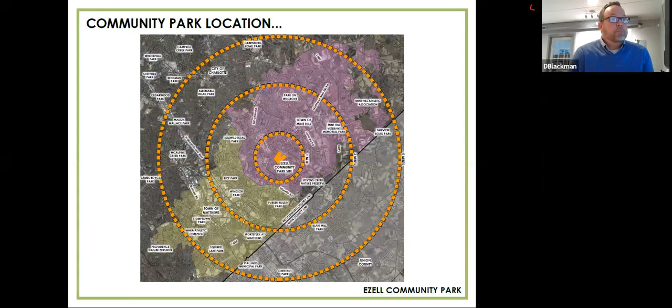Let's move to the next slide. As James mentioned, we're going to go over the definition of what a community park is, just to keep it in the framework of understanding the size of this park, its intended attributes, and how it's supposed to serve the citizens of the county.

Generally, as a minimum, community parks are 20 to 100 acres in size. They're designed to serve a more localized area of the county, usually within a 15-minute drive, so 8 to 10 miles out.

The amenities can be active or passive, or a combination of both. Active amenities are things like fields and courts. Passive amenities include walking trails, picnic shelters, and similar features. Compared to regional parks, community parks tend to be smaller in quantity, size, and the amount of tournament play that happens there. As with all community parks, Ezell Park will also have a required 100-foot buffer around the property to protect the neighbors. With that, we'll turn it back over to James.

He'll speak to a review of the input data we've received through the public input website, as well as the public meeting we had recently. Thanks, Dan. I've always wanted to say 'survey says,' so if I say that a lot, please bear with me. But this is information that we got off the website, which was very interactive.

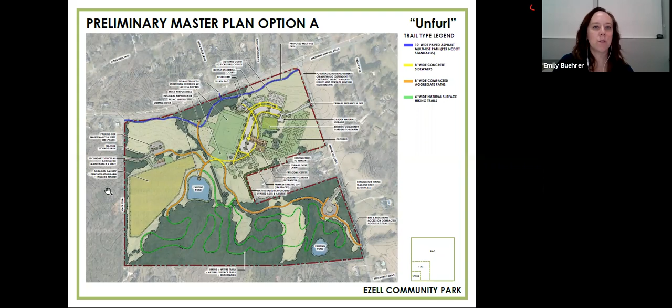And then if you switch to the next slide, we're gonna dive a little bit more into detail on the core area of the park where most of the amenities are.

So we have the Welcome Center, which is sited along the ridge of the park near the highest point to allow for the vistas and capture the breeze in the summer.

The building is oriented east-west, so the low sun in winter will help heat the building while the overhangs shade the building to help cool it in the summer.

The southern building overhang opens up to the proposed community garden expansion area, which is about a quarter of the size of the existing gardens. Due to some of the site constraints with this scenario, the room for expansion is limited in this option.

The rear and northern building overhang opens up into a semi-formal event lawn that is terminated by the existing large oak trees that sit on the knoll of the property, with a working orchard draped over the topography beyond.

Looking west from the entrance of the Welcome Center across the ridge line is the large mowed field area spanning the ridge that could be used for practice or pickup games, with that view from the Welcome Center terminating at a small picnic structure beyond.

Leaving the picnic shelter and following that curved spine to the south, you travel along the vegetated windbreak and through a field with birdhouses to a sloped oval lawn that is the informal amphitheater.

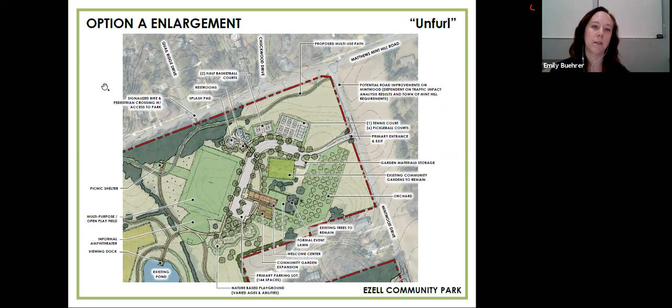And I'm going to pass it to Pete with Stitch Design Shop to kind of go through an option of the architecture of the Welcome Center. Thanks, Emily.

The Welcome Center, as Emily mentioned, is on top of the ridge, and it is low slung and agriculturally inspired from its form and its materiality.

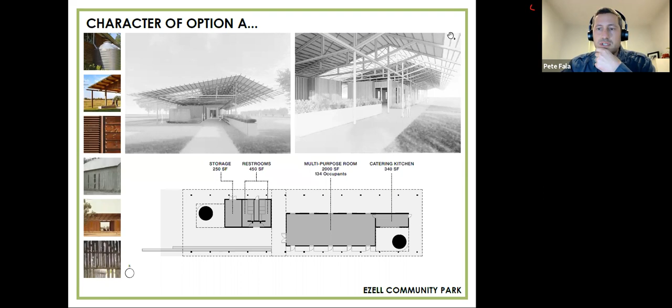You'll see some inspiration images on the left of the page, and I'll start with the plan on the bottom. The program of the Welcome Center includes a multi-purpose room that's around 2,000 square feet with a warming kitchen and catering kitchen. Also included are public restrooms accessible from park visitors as well as folks renting the multi-purpose space. So it's a dual function, and there's some storage as well in that element.

The two darker images that you see in the plan are cisterns. So we see this low slung roof form being able to capture water, store it on site, and reuse it for the community gardens planned north of the Welcome Center and the expanded community gardens planned south.

One of the main aspects of this particular design is that circular path that Emily was talking about really pulls visitors through this space, creating areas of space under the roof structure—outdoor rooms that are not necessarily enclosed, but covered. So you can understand how you would use the facility if you're just in the park as a visitor, or if you're attending an event at the multipurpose room, you're able to spill out into these areas.

The form is agriculturally inspired. The materials are nature-based, and you think of the inside of a tobacco barn or a decommissioned farm implement when you're in this structure. It really takes advantage of that low slung roof form to celebrate the history and the pastoral nature of the land.

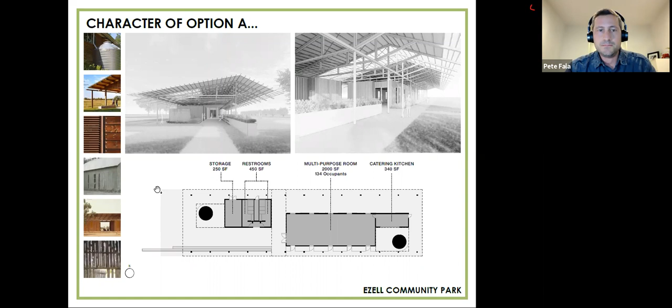Go to the next page. All right, so we have nicknamed this option Sunday Drive. The drive into the park is really meant to feel like an old-fashioned Sunday drive, slow-paced and relaxing, curving up, down, and around the terrain, incrementally revealing the natural beauty and the pastoral landscape of the property.

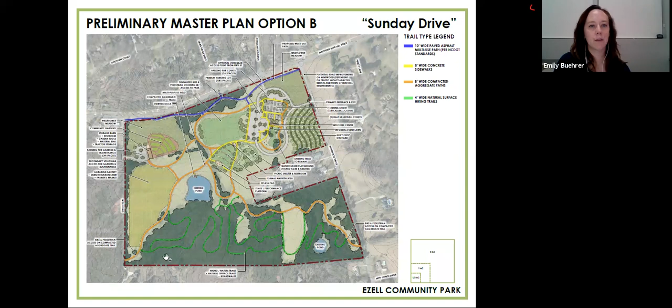On the next slide, we'll dive into the park core a little deeper. The drive and the trails meander to try to preserve and protect the existing habitats while providing opportunities to observe and interact from a distance.

The Welcome Center is situated on the ridge along the east-west axis to take advantage of passive solar and wind opportunities. The gathering space looks out on and opens up to an informal event lawn that is just a mowed area, with the natural site vegetation left to grow up around the edges, framing your view up to the old oak trees on top of the knoll.

A gravel path extends beyond the building toward the alley crop orchard that contours with the land. North of the Welcome Center, we're proposing a vegetated buffer to create a slight separation from the active sports courts, where we have two half basketball courts for fun pickup games with friends, and an area for pickleball courts and/or tennis.

There's a small separate parking lot just north of the tennis courts for court use. To the west of the main parking lot is an open mowed field that can be used as a multi-purpose field for practice, pickup games, flying a kite, throwing a football or frisbee, having a picnic, or just a place to take the little ones to run and burn off some energy.

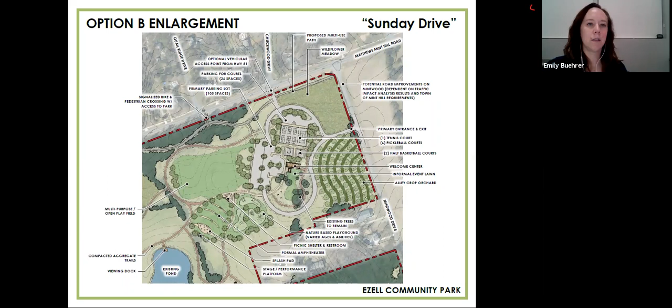And I'm going to turn it to Adam now to talk through the architecture, a second architecture option.

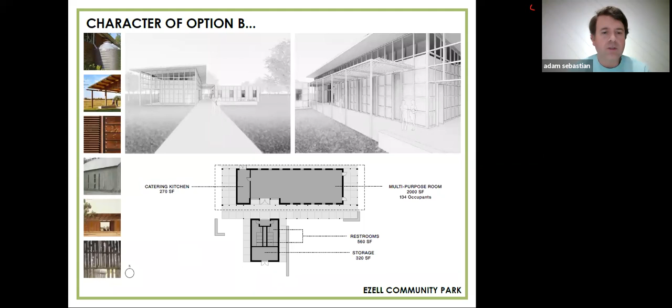Thank you, Emily. In this option B, very similar to option A, our design team was really inspired by the sense that this building could take cues from an agricultural vernacular. The site is so beautiful that we could almost see these structures starting to replicate barns, but in a more progressive aesthetic.

Looking at the floor plan, one of the big changes you will notice between both schemes is that in this version, the bathroom and storage component has been removed and pulled away from the multi-purpose room and the catering kitchen. The intent of that design is to allow both structures to operate independently, which we think from a functionality standpoint makes a lot of sense.

What unites those two structures is this idea of a vegetative trellis, seen in the upper right-hand image. That trellis is south-facing, and we can imagine vegetation, vines, and flowers growing up and onto it, allowing the architecture to take on a vegetative state. This concept was inspired by old barn structures typically seen throughout North Carolina that have been weathered and battered, where the siding has been ripped off and the exposure of the structure is seen.

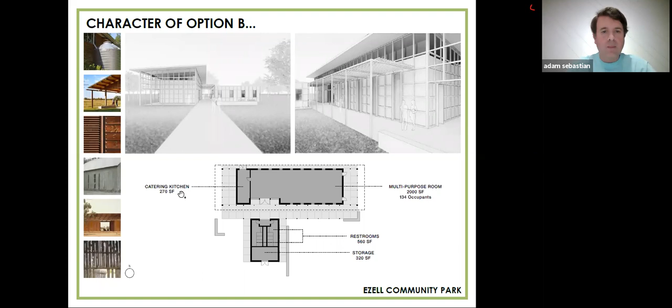Okay, so I know we just threw a lot of information at you. I'm going to take a quick moment to summarize and recap the two options we just presented. In option A, which we called Unfurl, it retains the existing garden location but offers very little room for expansion.

It proposes a specialty splash pad with an immediately adjacent restroom. It also provides a more informal event lawn instead of an amphitheater, but a more formal outdoor space near the Welcome Center. It also proposes a small dedicated parking lot for hiking.

In option B, Sunday Drive, this relocates the community garden but offers a much larger footprint for it, while also providing a dedicated restroom, parking area, space for tools and materials storage, and opportunity for complementary programming.

This plan also proposes a more basic splash pad that is part of a more formal amphitheater space and is in closer proximity to the nature play area. The Welcome Center outdoor space is informal and left more natural, and there's no dedicated parking for hiking in this scenario.

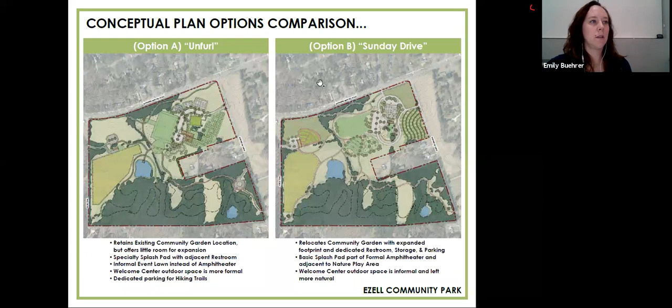All right, so Emily and team, great job going through two what I consider to be very well thought out concepts. Even though the amenities within each concept are similar, the arrangement and some of the approach to the way those things go together is a little bit different. So it took a little bit long for us to go through that.

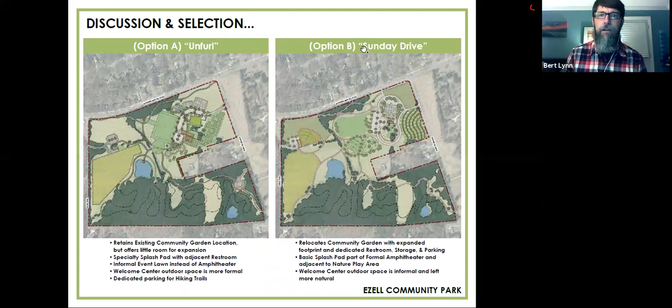I was very interested to see how that would go. So I'm going to stop sharing those. Let's see, I don't know if you can still see them or not. And then we've got the 2 concepts showing here, and then we're going to look at the chat and see if we had any questions or comments come through. And Katie or David, if you saw anything there, feel free to unmute and let us know.

Yeah, there was a few questions. As you mentioned, a couple of them were answered in the chat. I just wanted to reiterate that the master plan maps will be posted to the public input page.

So one of the questions here was in relation to option B: the bike and pedestrian path in the bottom left corner appears that it would be closer to the neighboring property than the 100-foot buffer previously mentioned. Could you speak to that, Bert? Yeah, if it is shown that way, we will make sure to make that correction when we go through and finalize the plan. We will ensure that we have at least 100 feet, if not a little bit more. Part of exactly where those paths end would be related to what's on the other side of the road. Potentially, if there's a driveway there, we wouldn't want a trail to intersect with the driveway, so we might shift that a little bit further away. So that's a good question.

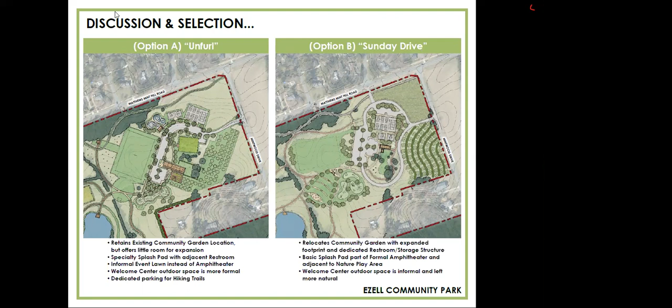Yeah, that's a great point. There's a volunteer or two in the chat. We already have hands raised to volunteer. That's great.

All right, well, we might not get to all the questions, but there's a couple more. This one's for the design team. On option B, can the road be connected to allow entry and exit as desired, favoring a right turn only? In the conversations we've had with NCDOT, that would most likely be the case when the Highway 51 roadway improvements happen, that if we had that direct connection to Highway 51, like we have shown, that alternate access point would most likely be converted to a right-in, right-out only when those improvements happen. As of right now, NCDOT has indicated that we could have a full movement access there. There would most likely be some road improvements on Highway 51 that we would have to participate in to make that happen, though.

Thanks, Emily. There's a question about the birdhouses. Will the birdhouses be usable by birds? I was thinking they'd probably be turned off by the amount of people so close to their homes. That's another opportunity we discussed internally as potential partnership with local schools, as different types of learning opportunities for kids, or partnerships with others to help maintain and study. Wherever we end up locating them would be in locations ideal for that type of habitat that the birdhouse is designed for.

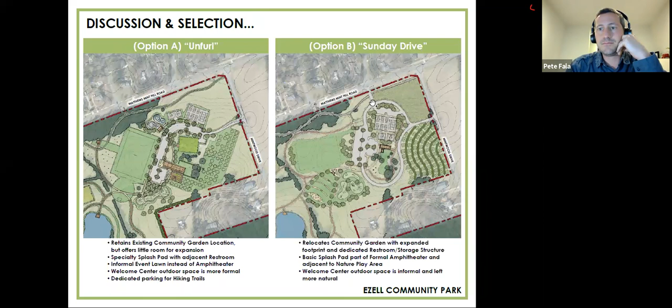Okay, what considerations have been given to minimizing additional cut-through traffic for Mintwood Drive?

This has been in conversation with the town of Mint Hill, and they understand that this is something that's occurring. We've not had any indication from them on what action will be taken or what they plan to do. They just understand that there are people coming through neighborhoods that need to get to 51 and other joining neighborhoods. We don't know if there's anything we can do as part of our project that would be outside of our perimeter to help improve that.

Okay, I'm going to ask one more question, and then if I've missed anyone's question or anyone wants to speak up after this one, raise your hand or just unmute. There's not too many of us.

What is the difference in the amount of parking, and is it possible to have 2 parking areas in option B?

So in option A, the main parking lot is about 145, and in option B, the combined main parking lot and the smaller parking adjacent to the courts equals about 130. So they're very similar in the amount of parking in the main core of the park. We weren't showing that additional separate parking for hikers in B, but that's totally an option we can add — some of these pieces are mix and match. So if that's something people like, that separate parking just for hikers on the trails, we can totally add that.

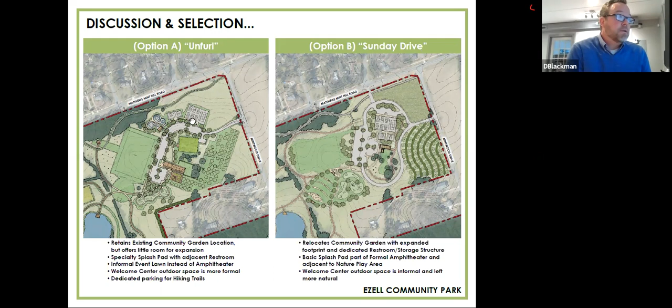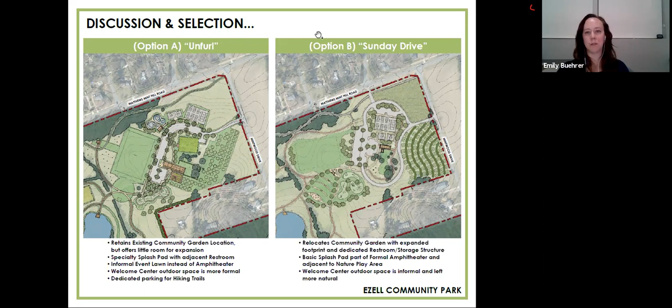I don't know if it was confusing, but there are restrooms as part of that welcome center. So if you're on the courts in option B, you wouldn't have to go to that restroom near the amphitheater. There are restrooms as part of the welcome center in both options.

Will there be wireless internet access at this park? Given the changes we've had with COVID, children might want to use their iPad, or parents, will there be access so they can maybe do work or homework while they watch their kids play? That's a great question.

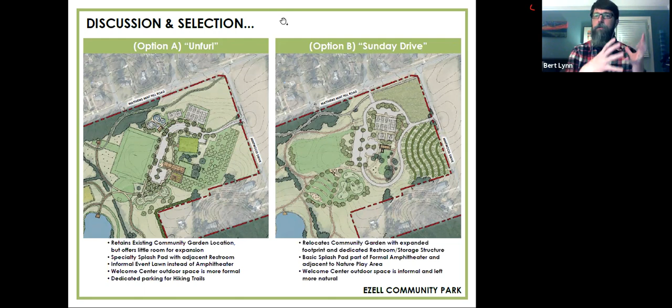That is something we are looking into doing, not only at our new parks like this one, but also at a number of our existing parks, even some smaller neighborhood parks, for that very reason. We know it would be much easier to do at a larger facility like this, because we'd have interior storage space for IT cabinets and things like that. It's a little more protected and easier to integrate the other things you'd need.

We would need easily accessible power outlets for folks to plug in if they're using it for that. But I'd say our goal would be, when we build the pavilion here, that we would have public Wi-Fi as part of that.

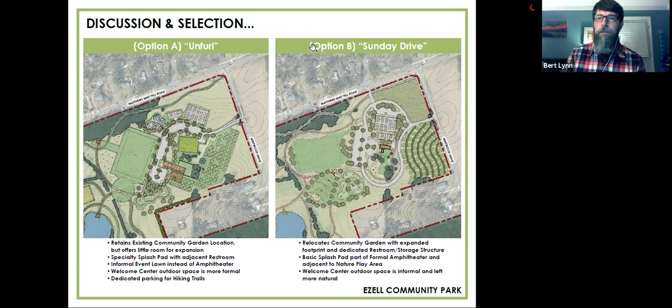We've shared a lot of new information with everybody tonight in a very short amount of time. We will soon post the recording for tonight's meeting, along with the presentation slides and the two concepts, on the Ezell Park Public Input website. If I know Katie, she will post that in the chat, or David, in just a minute. This will give everybody here, and those unable to attend the meeting, an opportunity to go and review what we shared tonight.

We'll provide a survey to continue to gather votes on the concepts you prefer, and a comment area where you can provide more specific information like you did in the chat this evening. We're going to keep the survey open for the next 2 to 3 weeks. At that time, our design team, led by Stimmel, will begin developing the final master plan, provide us with an overall project budget estimate, and begin to identify those elements of the design that will be part of the initial construction project.

This will lead into the rezoning process necessary through the town of Mint Hill. The rezoning process will include an additional community workshop where we will share the updated master plan for Ezell Park. Once the rezoning process is complete, our design team will begin work on the final construction drawings. Our goal is to bid the project and begin construction in early 2022, and complete the project in spring of '23.